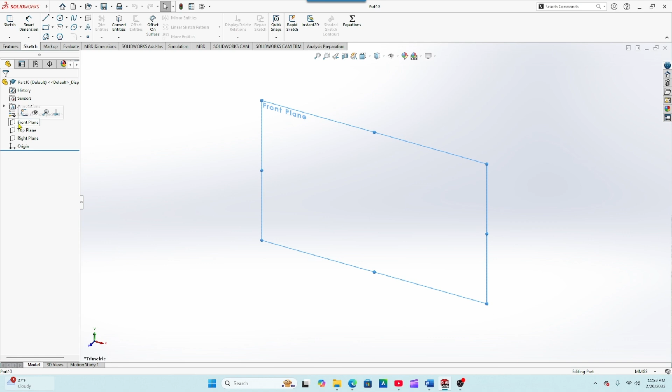As always, we are going to be drawing in millimeters, grams, and seconds. We will be drawing in the front plane. So we'll open up our sketch here.

Today we're going to do something a little bit different. We are going to use a center rectangle, and we are going to start from the center and go out to a corner. So we're just going to draw this out here. It doesn't really matter what size we use, and we're going to make it for construction.

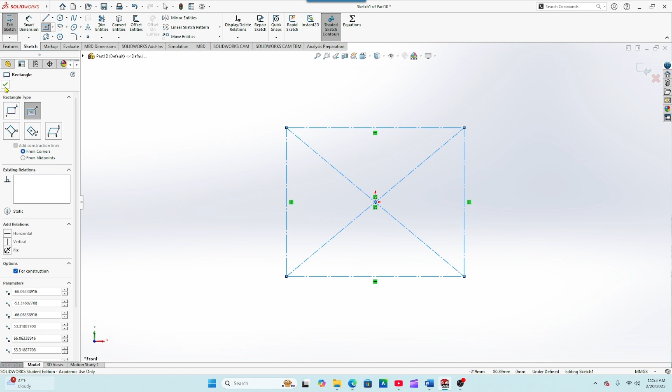And then I'm going to go ahead and dimension this. The bottom base of this will be 120 millimeters, and then the vertical base here will be 90.

All right, so right now we have a fully defined sketch, and we're not done, but so far so good. We're going to go ahead and go into our line tool, and I'm just going to start sketching out everything that I need. So I'm going to start with a line in the corner down here, bottom left-hand corner.

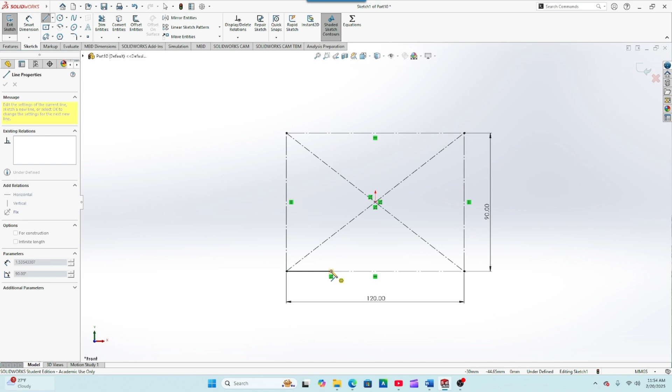I'm going to go horizontally to the right about 30 millimeters. Does not have to be exact. And then I'm going to go into my radius tool, and the radius that we're looking for is about 30 millimeters. Again, does not have to be exact, but we want it to be close.

And then we're going to go to the corner here. Then we will go up approximately 40 millimeters, and then to the left approximately 30 millimeters. We'll go up about 10 millimeters.

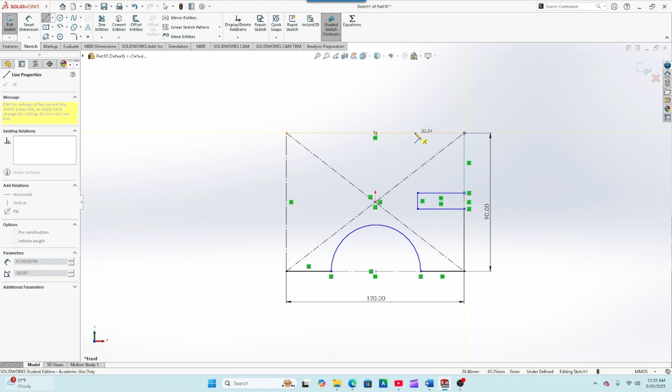And then go back to our line here, and we are just going to rinse and repeat everything. I'm going to go about 30 millimeters, again does not have to be exact, but we want it close. And then we will lock in approximately 30 millimeters and click.

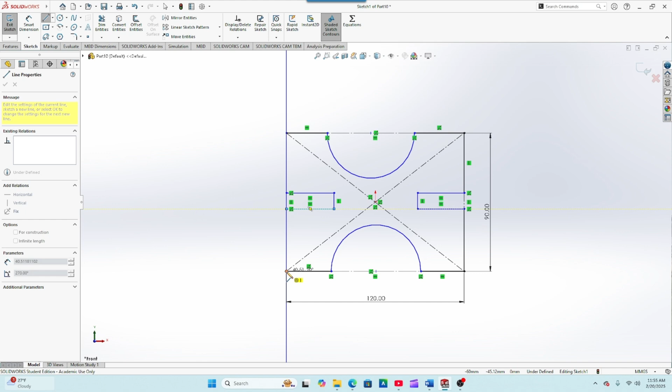Come over like so. Again, I don't want to get any relations in here. On these lines, you'll see where I'm not worried about it, and then those areas where I am worried about it. And then we're going to come right down here like so. We have a fully enclosed sketch.

All right, so now I'm going to add a few relations in here. I am going to make these two lines, which are already locked in—really doesn't matter, but what I am going to do is make both of these collinear. And then I will do the same thing here, which they're already collinear. And then I will do the same thing here.

Locking everything in, and then we can go through here and start dimensioning everything. So here we're going to make it 30 millimeters. We'll make this radius 30 millimeters. And then this one's already locked in, which it should have been. We're going to make this 40. We'll make that 30. We'll make this one 40.

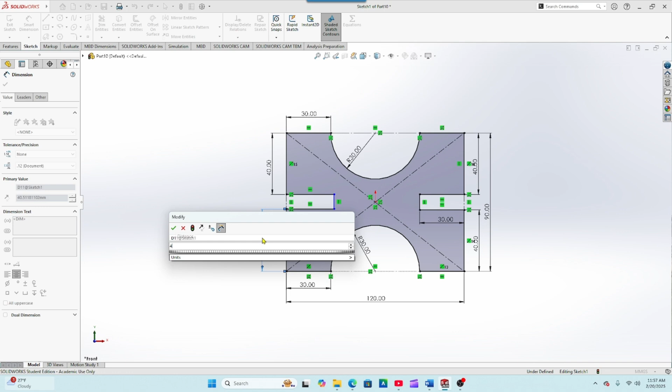And then we're going to come in here. We'll dimension this one to 30. And then we'll make this also 30, like so. And then 40, 40, 30.

And we are fully defined at this point. So we click out of our dimension tool. The last thing that we need to do for this is we have a

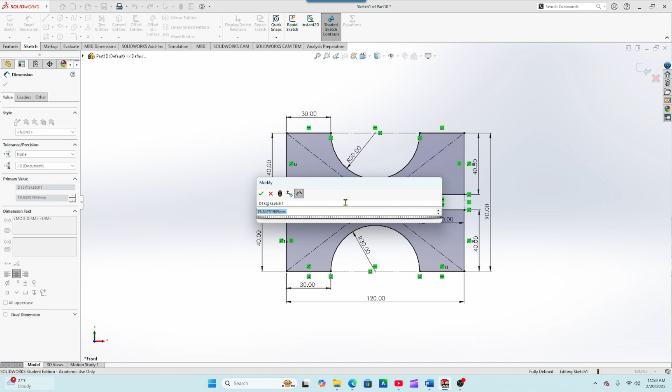circle or hole that's going to go in here. So we're going to go ahead and draw that out. It has a diameter of 18 millimeters, so we'll get close to where we need there. And then we shall dimension it to 18 millimeters.

Nope. Man, my keyboard is just giving me fits here lately. Maybe I need to change the batteries in it.

All right, so now we're still fully defined. Sketch looks exactly like it does in the textbook, and we are done. We are going to save this sketch as Chapter 2, and it will be hands-on test drive 4. Hit enter, and we're done.